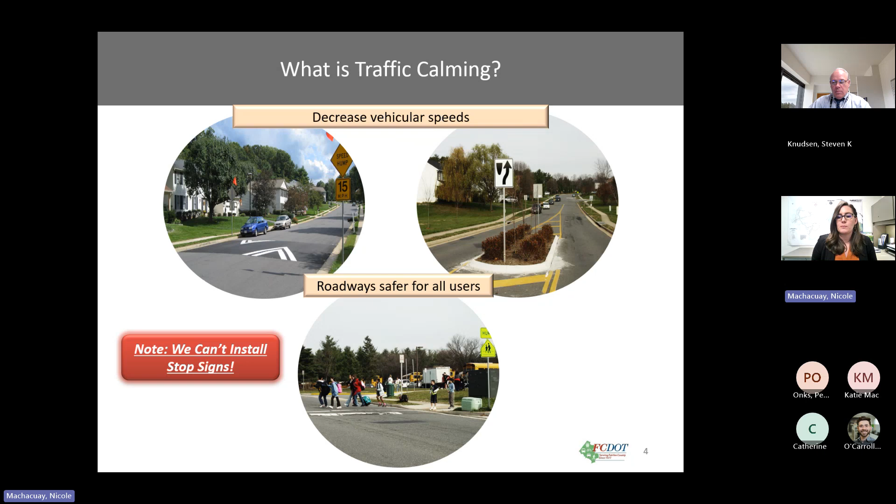Let's begin with what is traffic calming. Traffic calming is the installation of physical devices to reduce vehicle speed. These devices can be either vertical or horizontal. Vertical devices are driven over, such as a speed hump, as you can see in the upper left-hand image, while you drive around horizontal devices, such as a raised median island, as you can see in the upper right-hand image. Both types of devices make the road safer for drivers and pedestrians. I would like to note that through this process, we are not permitted to install stop signs.

So the upcoming program can be broken up into 5 steps. Step number 1 is project identification. Step number 2 is plan development. Step number 3 is community engagement. Step number 4 is ballot phase. And step number 5 is project installation, which is the final step.

Now moving to step number 1, to break it down, as I stated, all traffic calming projects are always community initiated. The process begins with a request from the community to our supervisor's office. Once that request is received, FCDOT will first complete a basic eligibility review, then we will conduct a traffic study. Once the subject road passes both the eligibility review and traffic study, the community will then form a task force.

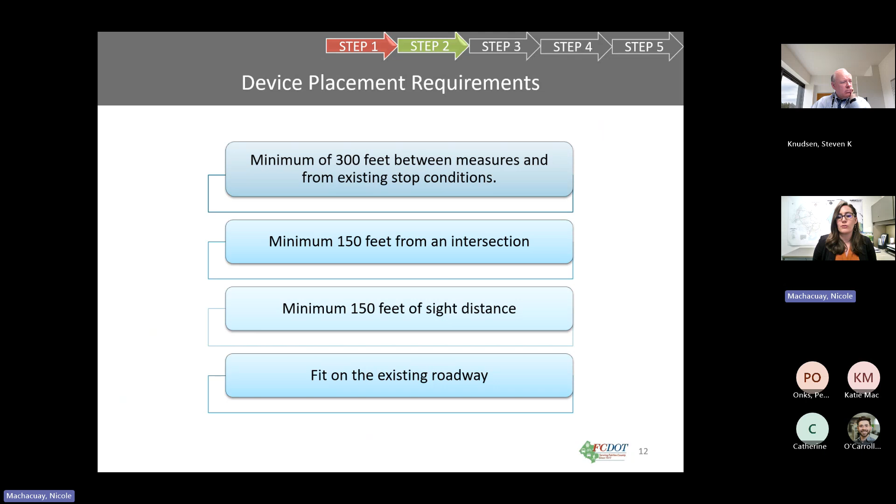There are device placement requirements for typical vertical devices. We need a minimum of 300 feet between measures and existing stop conditions, a minimum of 150 feet from any intersection, and a minimum of 150 feet for continuous sight distance with any device. It needs to fit on the existing roadway, so we account for driveways, manholes, or utilities, as well as the grade of the road.

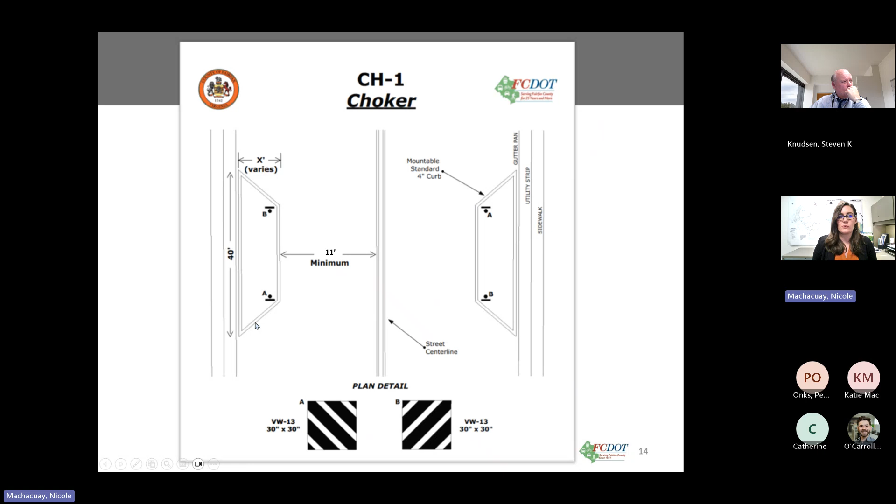Here we have a schematic for a 2-way choker. As you can see, we have 2 lanes, and then we have the choker. It's designed to narrow that lane as drivers are passing through.

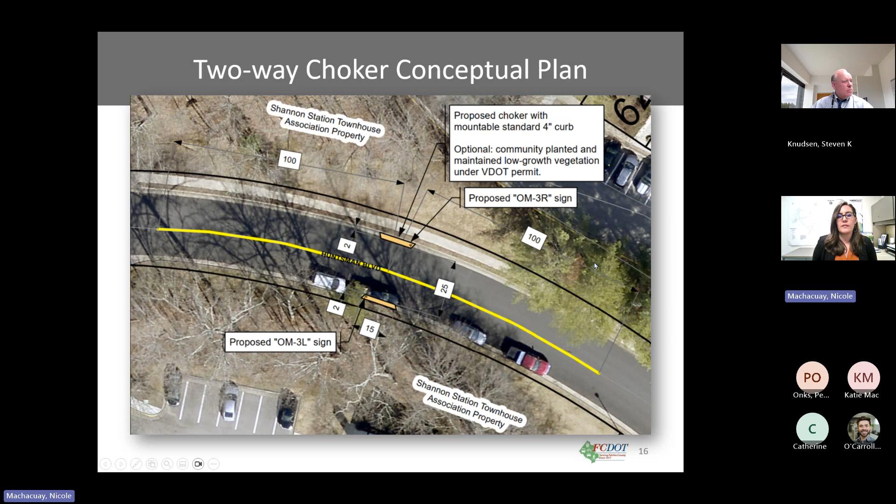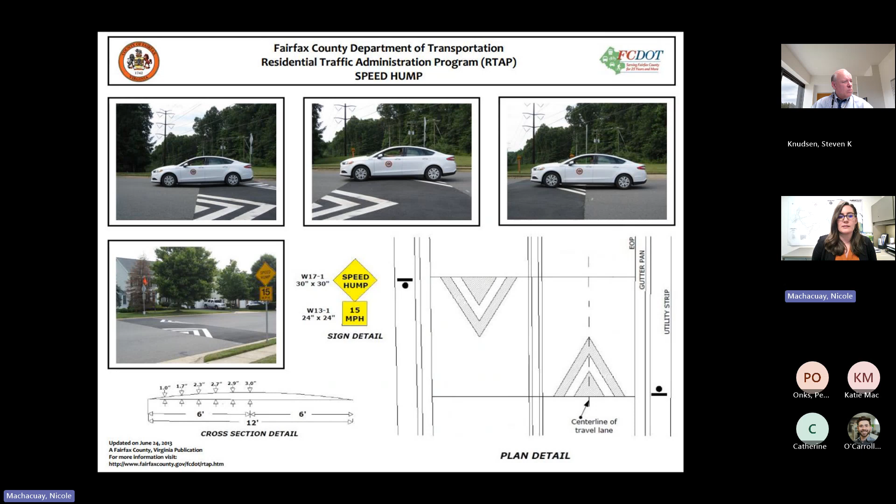Moving on to step number 3, the community meeting, which is where we're here today. This is where FCDOT presents the plan to the community to obtain feedback. Based on that feedback, the task force will decide whether they want to amend the plan or proceed to the next phase. If the task force decides to move forward, we can then move to the ballot phase.

So step number 4: each household in the ballot area will receive 1 vote and sends it directly to the supervisor's office. The ballot time period will be open for a minimum of 3 weeks, and once that has passed, the supervisor's office will tally the votes and notify the task force of the results.

There are 3 ways to return your ballot by the deadline: 1, you can mail your ballot directly into the supervisor's office; 2, you can hand deliver it directly to the supervisor's office; and 3, you can email it directly to the supervisor's office. Ballots should not be returned to the task force, so please use one of the 3 methods listed above.

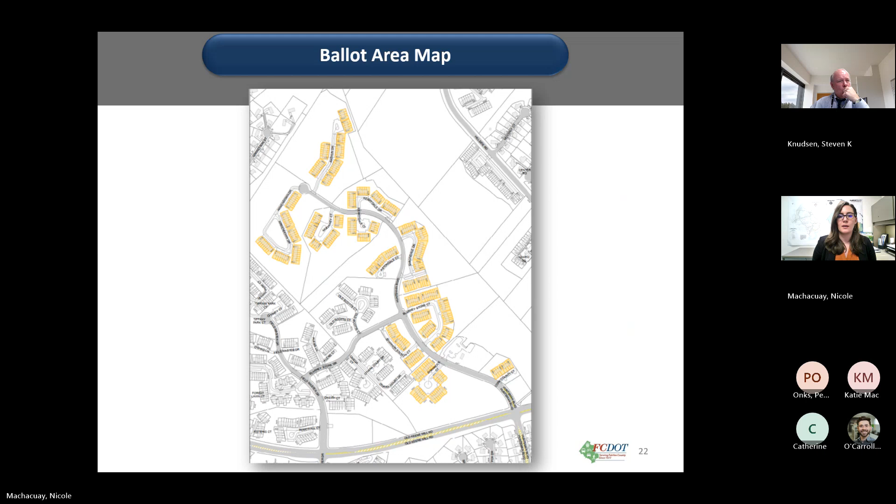Here we have the ballot area map for Huntsman Boulevard. We have 306 ballots. For the proposed plan to move forward, we will need greater than 50% of all households to vote in favor. So for Huntsman Boulevard to move forward, we will need 154 yes votes.

So if we get the required number of yes votes, we can move forward to step 5, which is project installation. The traffic calming plan will be presented to the Fairfax County Board of Supervisors for endorsement, and a resolution will be sent to VDOT. Once endorsed and VDOT accepts the resolution, we will work with the Department of Public Works and Environmental Services to schedule installation, and finally the traffic calming plan will be installed.

Moving on to next steps for the task force. After tonight's meeting, the task force will need to follow these steps: 1, the task force determines and notifies Fairfax County if they want to move forward with the plan presented this evening. 2, the task force and supervisor's office will decide and notify FCDOT if the ballots in the ballot area are to be distributed to homeowners or occupants. 3, the task force will receive the ballot cover letter and complete the form as directed by FCDOT. 4, the task force sends the completed ballot cover letter to FCDOT for approval, and once approved, they will receive the verified ballot package. 5, the final step is for the task force to print and distribute all ballots to all homes within that ballot area.

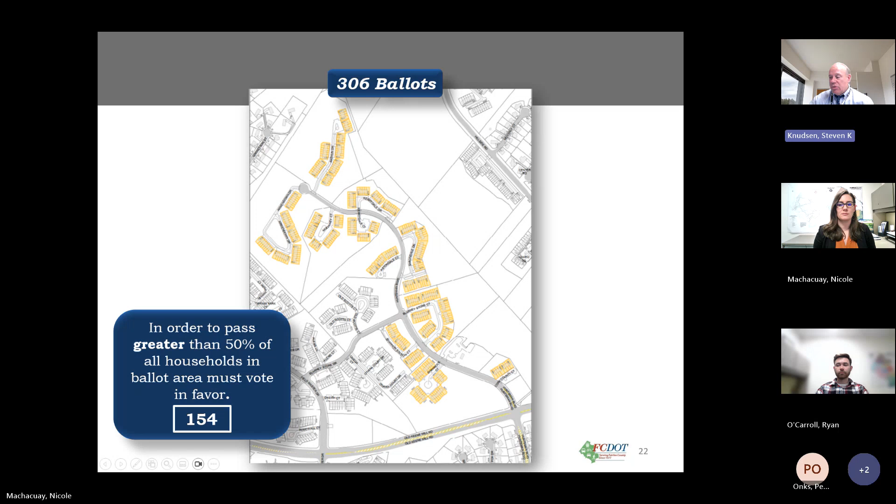If you want to drive through that device to see what it's like, or point any of your neighbors to those locations so they can drive through it too, that would help. As we said earlier, we will get this slide deck out to Peyton, and she'll send it out to you all. You can share it with the platforms you have available for your community. Then hopefully, after you've discussed with the other task force members, if you want to go forward, we'll get the templates for the ballot process out to you.

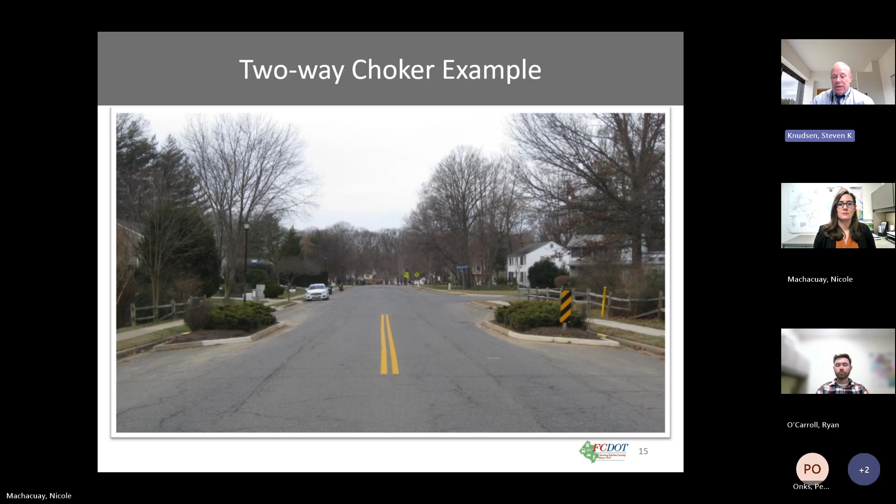So I think that might be it for tonight. Nicole, anything else? Ryan? Okay, I can't think of anything, Peyton.